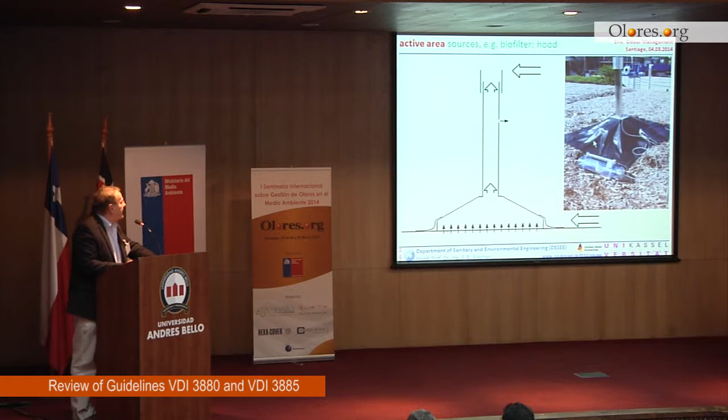And the decision whether you have the hood method or the complete cover is on one hand depending on technical possibility, and of course it is to be answered according to the question that you have to answer with the result. This is just an example for a hood of 1 square meter that you have to place on several points of, let's say, a biofilter. And the number of points you have to sample on is also given here.

You have these stipulations that you also find in the documents on your USB stick, and you see that we have at least 10 square meters representing, and if you have very small area sources, you have to have at least 4 samples.

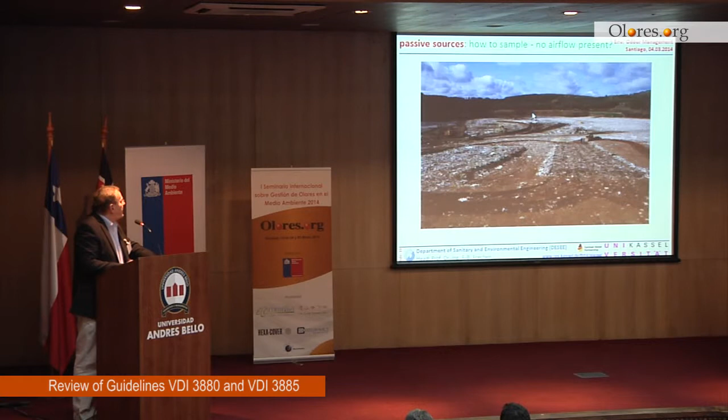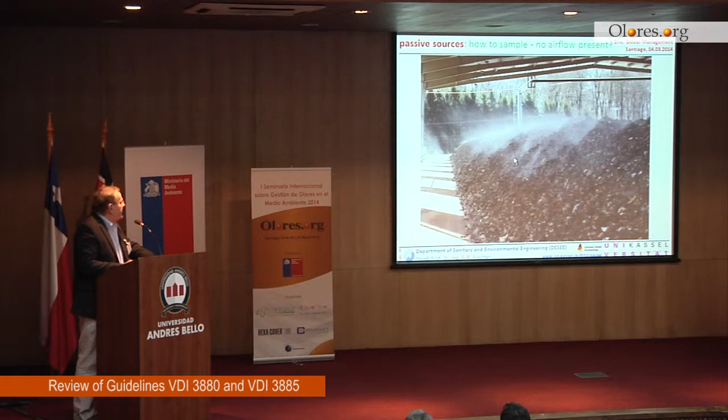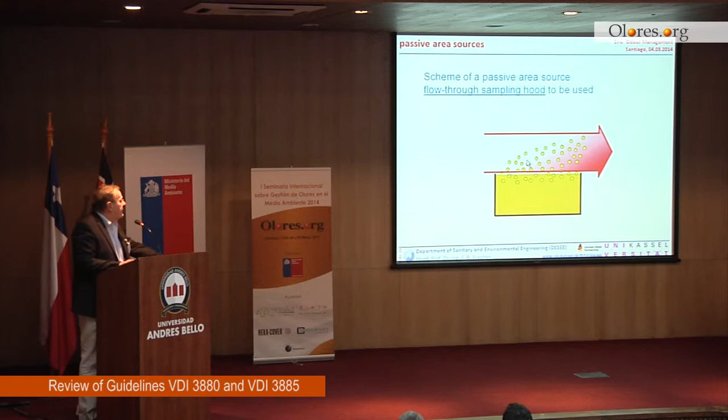Biofilters usually are designed with 30 or even more, usually today much more than 30 cubic meters per square meter an hour. If you look at standard aeration tanks, you will find that we are much below this, but there is still an outward airflow. You can measure this by just checking the blower that blows the air into the aeration tank. So what do you have to do in case of a passive area source? You have to use a flow-through sampling hood.

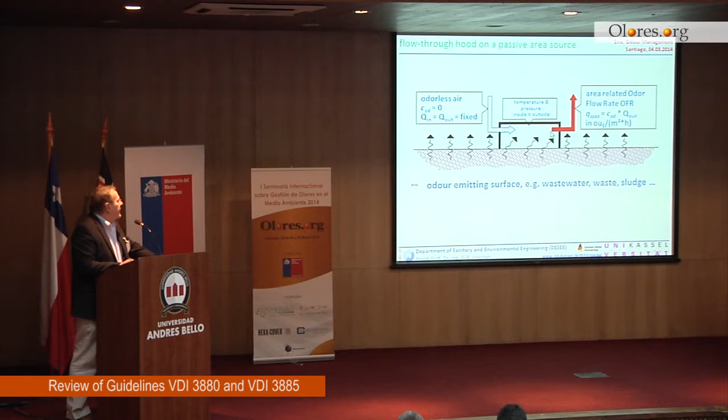And this is a scheme of what we do. We just cover part of the area and send clean air through this sampling hood, and we get out polluted air, and we can measure this. What we have is the surface covered by the box, by the sampling hood, in square meters. We know the flush air volume flow in cubic meters per hour, and this gives the flushing rate in cubic meters per square meter an hour.

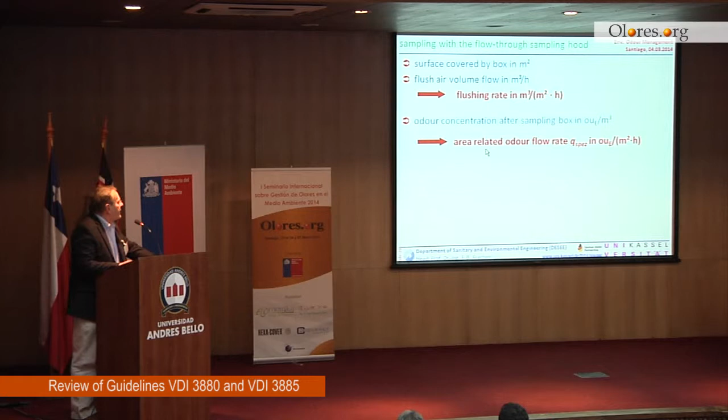We measure the odor concentration after the sampling hood, and this gives us the odor units per cubic meter, and this gives the area-related odor flow rate in odor units per square meter an hour. And this is the only number concerning passive area sources like wastewater treatment plants or landfills or whatever. This is the only number that can be used for comparison of different types of processes.

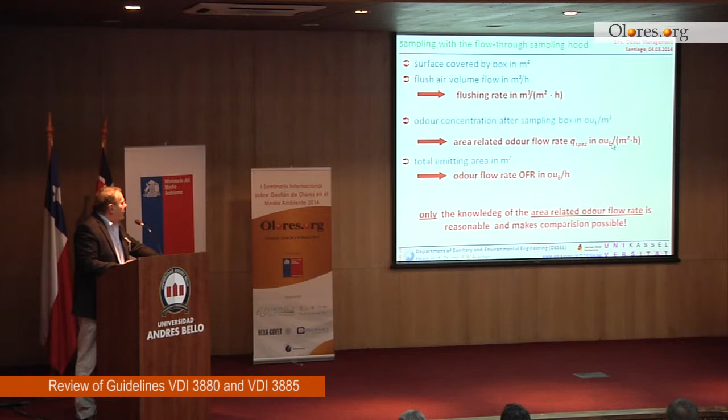Everything else is rubbish. If you have the total emitting area in square meters, you can get the total odor flow rate in odor units per second or per hour or per whatever time you would like to choose. And as I mentioned, only these numbers, especially this one, are of importance. In former times there were some other things, but nowadays this is the only thing.

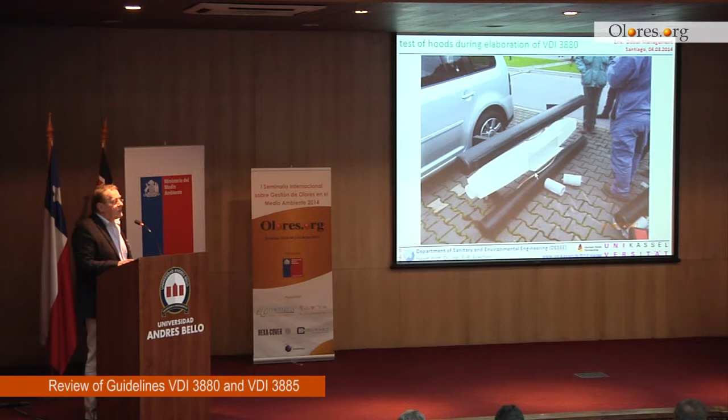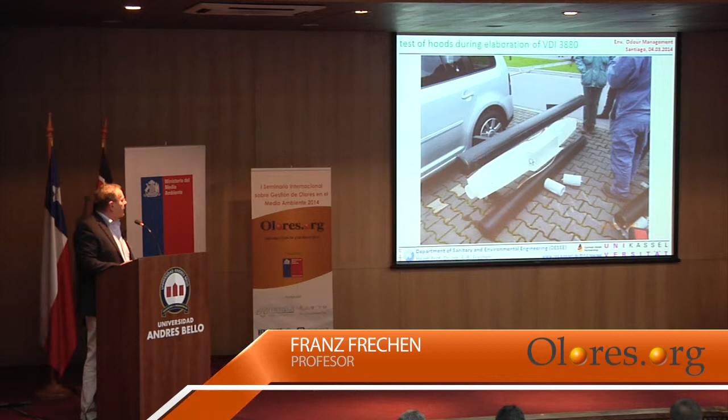Now it changed a lot, and when we elaborated the VDI guideline, in order to decide about the design of this flush-through sampling hood, we made test comparisons with several types that were on the market at that time at a wastewater treatment plant. This is one type with a very high flush rate going across this very small area. And this is it when it's launched.

And there are other ones. This one is a famous Spanish one. This is a famous German one. And so we made comparisons with these measurements and finally came up with a general scheme like this. We don't have a labyrinth inside. It was discussed to have a labyrinth inside to increase the speed over the surface, but we didn't decide for that.

The dimensions are given in the next slide, and this is just a cross-section showing the principles of a sampling hood like this. The dimensions set in the guideline are 1 meter by half a meter and 30 centimeters high. And, of course, an area-specific ventilation rate of 30 cubic meters per square meter an hour.

And if we work at the borderline between flow-through hood and other ones, we operate with this 30 cubic meters per hour. So it's absolutely necessary that this exactly matches the criterion for which type of sampling device you have to use. And if you have, by chance, an aerated source that produces exactly 30 cubic meters per square meter an hour, in theory you wouldn't feed any fresh air into your sampling hood. So that's the decision.

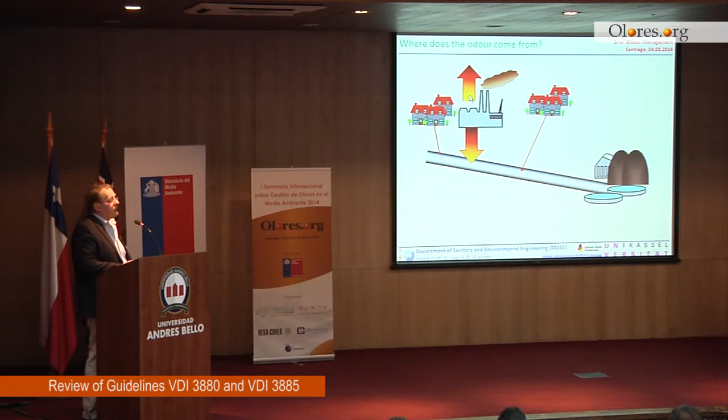This is olfactometry measurement of the odor emission capacity of liquids. And this has been one of my favorite hobbies for a long time. If you look for the emissions, maybe you have enterprises that have emissions directly into the air that you have to sample correctly according to 3880, of course. But you also have industrial wastewater discharge into a sewer.

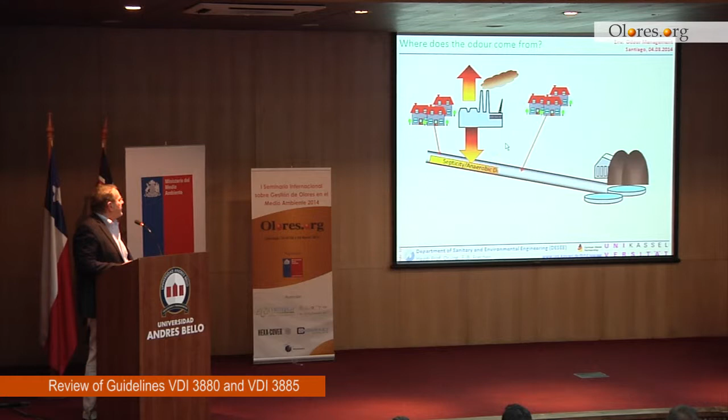You have municipal discharge into the sewers, and then in the sewer you might have septicity, anaerobic degradation, and sulfide formation, because we have enough sulfate in every drinking water. As an average in Germany, 60 milligrams per liter, and this is easily converted in anaerobic processes to sulfide, of course, and this causes H2S emissions. So if we look for the real origin of the odorants, it's definitely the liquid.

From the liquids, the odorants go into the sewer air. From the sewer air, they go into the ambient air. And if there's someone living in the ambient air, he has a nuisance. But basically, if you look for the real source of the problem, you have to look in the liquid. For example, you have a very laminar, slow flowing sewer, which has a high content of odorants. You will not notice this in the atmosphere above the wastewater.

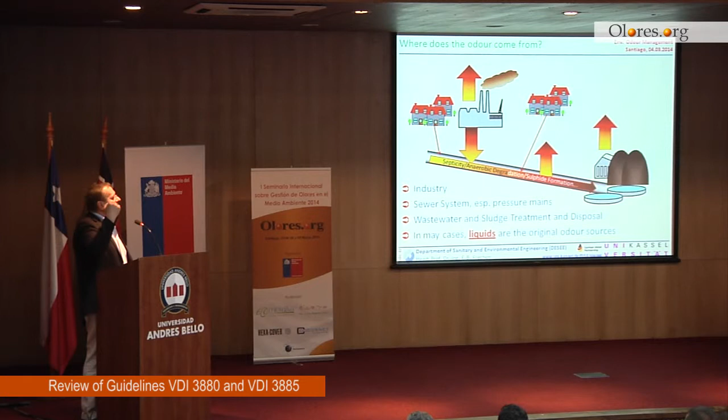But after maybe 2, 3, 4 kilometers where you have a drop and an increase of turbulence, you will find a big release of odorants at this drop. And then all people say, well, what's happening at this point? Is there something specific with that point? That's not the origin of the odor. The odor is much farther upstream. And to detect where the real origin of the odor is, you need to know about the odor concentration in liquids.

The definition is very, very easy. The odor emission capacity of a liquid is the total amount of odorants present in the liquid that can be stripped from this liquid under standardized conditions. It's not what you strip from, let's say, a wastewater in the sewer system at any given point. It's the maximum strippable amount of odorants. And the unit is exactly like we have with olfactometry. We have odor units per cubic meter, but not per cubic meter of air, instead per cubic meter of liquid. And as I mentioned, I hope that we will have it finalized in 2014.

As we said, we strip from the liquid, so we produce air samples, and these air samples can be measured. The quantification is done according to EN 13725, of course. But what is done prior to using this standard is the stripping test, the OEC test. And this is the OEC test reactor as it will be prescribed and defined in the guideline.

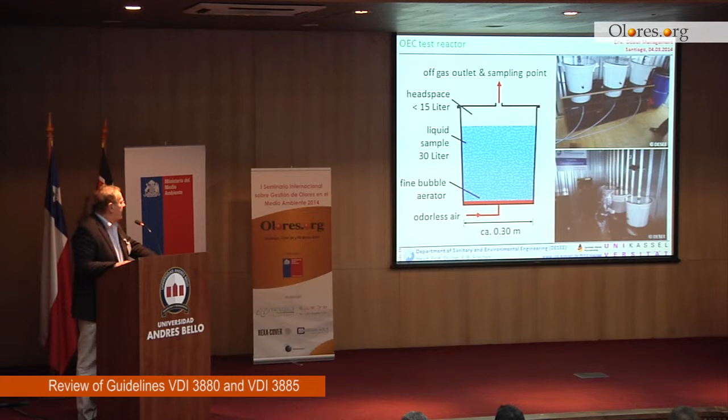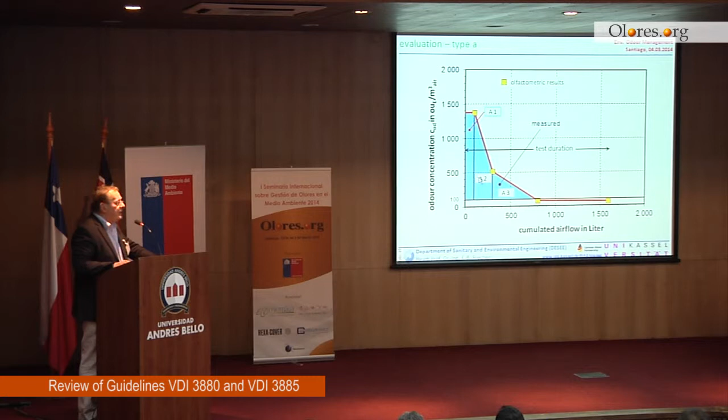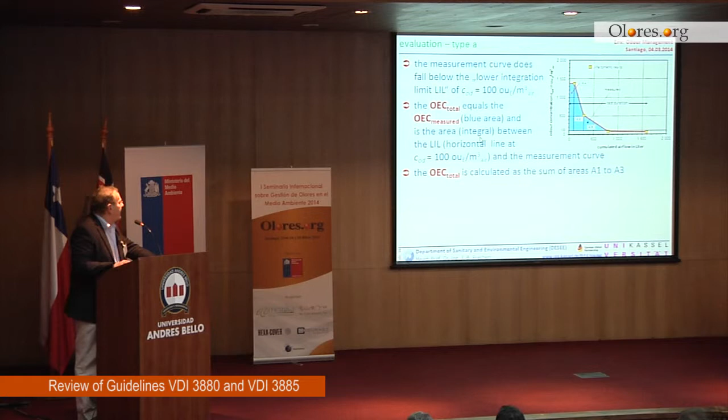In your documents, you find how to evaluate this more in detail. I won't tell it too much in detail. The OEC total, that is what we can measure here, is in this case identical with the OEC measured, which is the blue area. In the documents, you will find the two other methods and 2 other possibilities. So there you can get the odor units per cubic meter of liquid.

A thing that is very important is keeping sewer systems free of odor. And many cities spend a lot of money dosing chemicals into their sewer system. Paris, for example, spends on just the plain chemical cost between 3 and 7 million euro per year just to suppress odor. And the question, of course, is it overdosed? Is it underdosed? Is it efficient or not? With the OEC method, we could easily detect whether it would be overdosed or underdosed, and if we had this method online, we could even make a closed-loop process control to save dosing costs.

And this is what we have done at the department. We built an automated version, a small automated version of the whole test. You see this here. That's the second and third sulfide and odor measurement piece. At this moment, we are, with the city of Hanover, trying to have a much more simple device than this one. This does OEC automated. And this one, where you see the reactors are much bigger than you have seen before, was made specially for Berlin because they wanted to do a lot of research with 4 different e-noses behind these things.

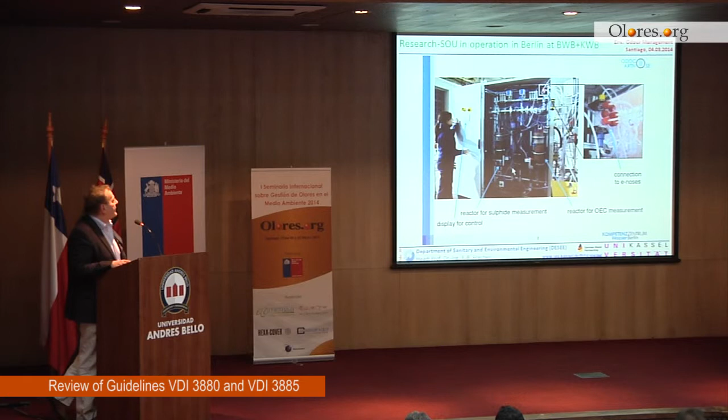Because if we want to do it online, we cannot use olfactometry, we cannot use test persons, we have to find something which can give an online signal, and these are electronic noses. In the project Berlin, we had 4 electronic noses to test. And so that's the reason why we always have to connect it with electronic noses.

A perfect e-nose would be able to measure the real odor concentration, but we don't have a perfect e-nose. This means we need a mathematical model that converts the 4 to 10 sensor raw readings into one number, which is the real odor concentration. We will come back to the real odor concentration in a second. To establish this mathematical model, and mathematics is the most severe thing with electronic noses, you need parallel measurements with e-nose and from the same sample with olfactometric data. And the more parallel readings, the bigger your sample is, the better is your mathematical evaluation.

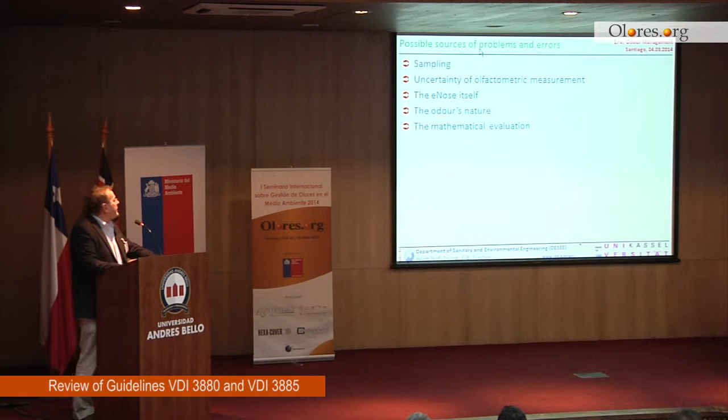Uncertainty of olfactometric measurement. We have to differentiate between the real odor and the odor measured by olfactometry, because you all know olfactometry has a certain error in itself. And if you listen to Berger, he says the error of olfactometry is about 50%. This means if an e-nose would perfectly explain the odor that we measure at the olfactometer, this model would have an error of 50%. So this just to keep in mind. And there are more possible problems. One of the possible problems also is the e-nose itself.

The T90 time, which is the time until 90% of the final value in the signal is indicated, no one of the electronic nose manufacturers tells you about that. They can't do it. It's impossible, because maybe some sensors have a very good behavior and they have a final value. Others don't go to a final value. We have oscillated readings, but here we can use means.

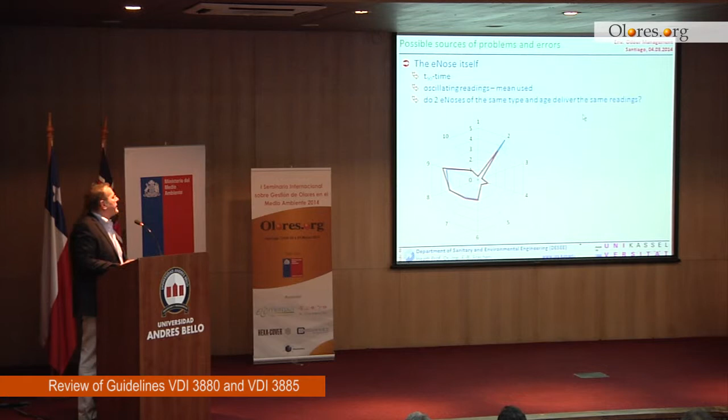We can ask the question, do two e-noses of the same brand, of the same type, of the same age deliver the same reading with the same sample? And here you see one of our tests. And you can talk about aging of sensors. You can ask, do these two e-noses, 1 and 3, which are new, and the e-nose 2, which was a little bit older, 2 years older, give the same reading? You see, this is not the case.

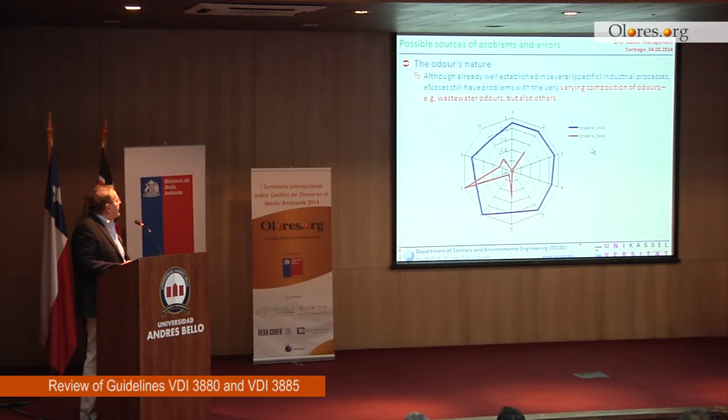So these are all possible problems that you could come across when you work with e-noses. And also the odor's nature is a problem in itself. Cocaine solo gives a different view than cocaine mixed with beer, of course. But the most important thing with e-nose is a mathematical evaluation. This is a crucial step. There might be two aims, basically. The qualification, which kind of smell is that? This might be pattern recognition with different types of mathematical methods, and quantification with different types of mathematical methods.

And if we deal with quantification, this is what we need for our online odor measurement, because we want to have something like the odor units per cubic meter of air. We have to look for quantification. And also the mathematics can kick you off. Just one example out of many. If you have a very small mathematical data sample, and if you have basically a nose with 10 sensors and you choose only 10 or 11 or less pairs of data, you will nearly in any case get 100% correct explanation, which is a mathematical artifact.

But the most important thing is that usually if vendors of electronic noses give a model and say, our nose explains odor as it is, they only explain historical data. But this is not what we want. What we want with an e-nose is we want to predict when the next set of raw data comes in. Without having olfactometry, we want to be sure that the model calculates the correct value. So it's not important to explain your data very well. It's most important to have a model that can forecast, that can predict the next incoming set of raw values. And this is what I call prediction ability.